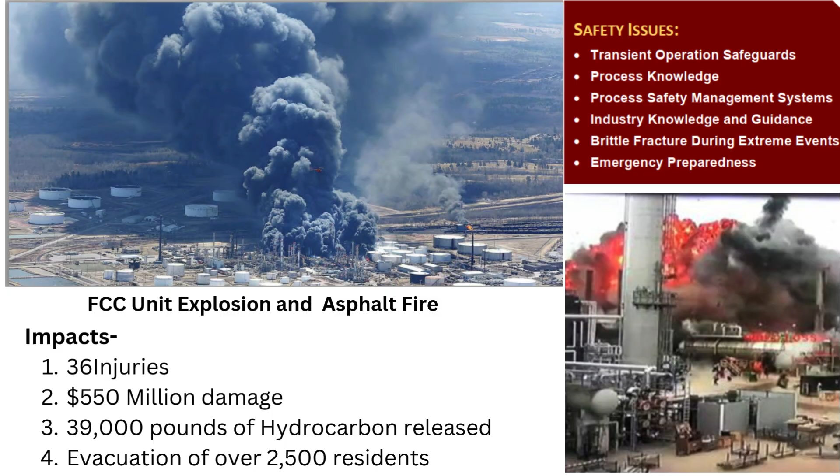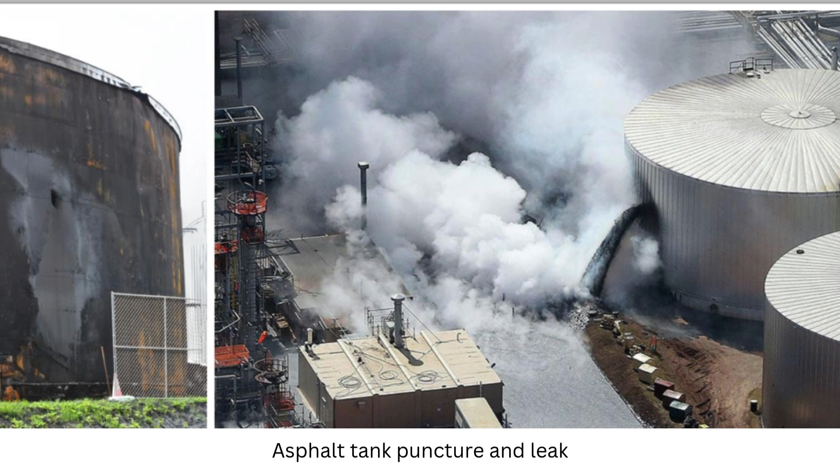On April 26, 2018, an explosion and subsequent fire at a refinery in Wisconsin caused 36 injuries and $550 million in damages. The explosion, during a planned maintenance shutdown, released 39,000 pounds of flammable hydrocarbon vapors and punctured an asphalt tank, leading to fires and evacuation of over 2,500 residents. The nearby hydrofluoric acid storage tank remained intact, avoiding a potential catastrophic release.

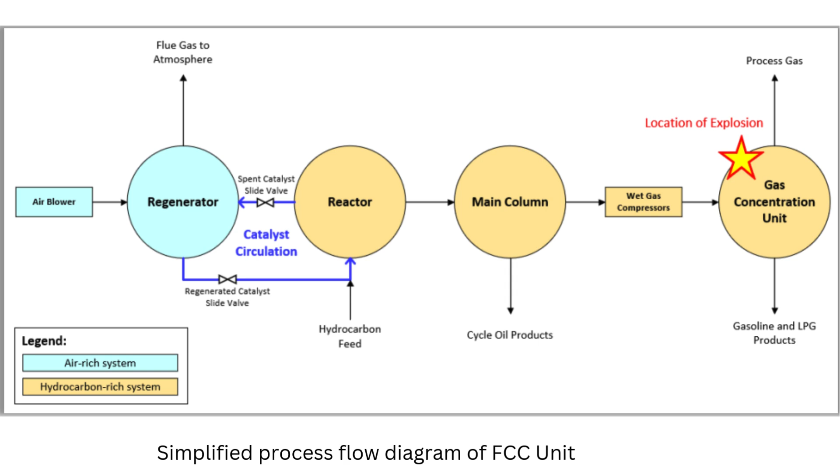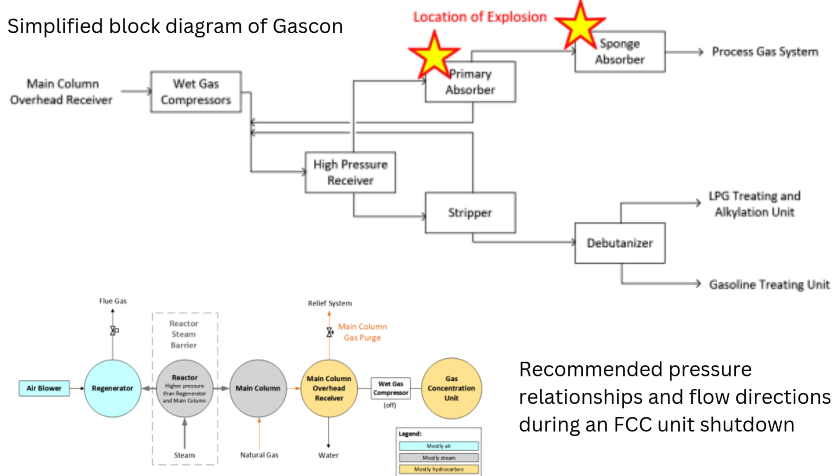What happened? Operators were shutting down the FCC unit, following revised procedures that included draining liquids, purging systems, and preparing for chemical cleaning. The shutdown process involved balancing pressures in critical systems to prevent hazardous air and hydrocarbon mixing.

At 9:58 a.m., during the shutdown, pressure imbalances allowed air to mix with hydrocarbons in the primary absorber and sponge absorber vessels. This resulted in an explosion that sent over 100 pieces of debris across the refinery, shaking buildings over a mile away.

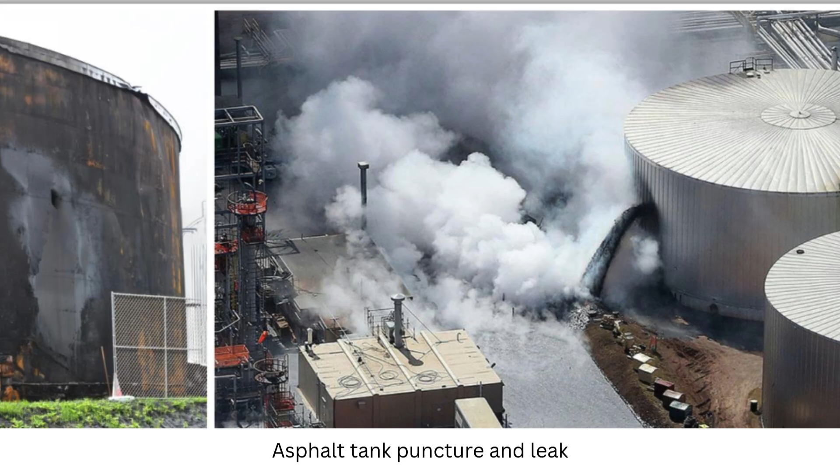The debris punctured an asphalt tank, releasing approximately 17,000 barrels of hot asphalt, which began flowing outside the containment area. At around 12 p.m., the spilled asphalt ignited, leading to multiple fires in the refinery.

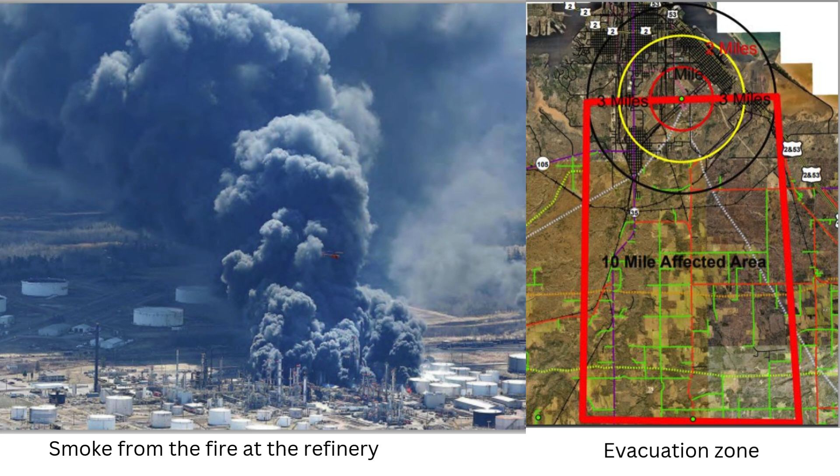Emergency responders worked to contain the fires, while the city of Superior evacuated residents within a 3-mile radius and issued advisories for nearby areas. Smoke and concerns about toxic hydrofluoric acid prompted a shelter-in-place advisory in Duluth, Minnesota, at 8 p.m. The fires were extinguished by midnight, and evacuation orders were lifted the following morning.

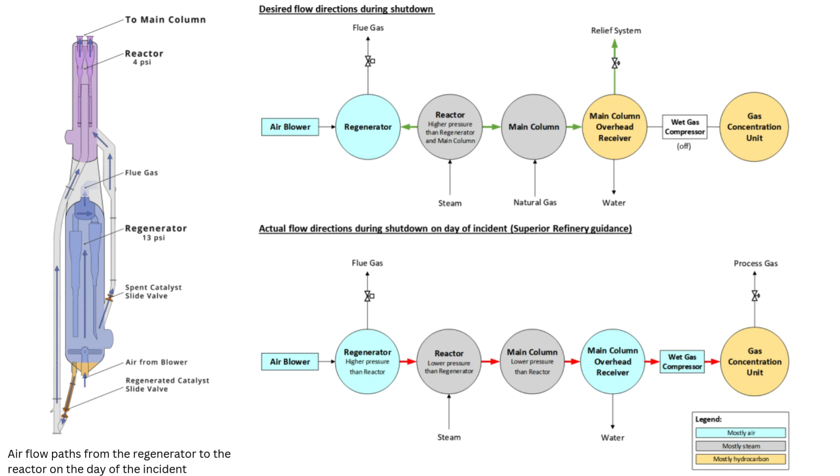What are the root causes? Operational gaps: failure to maintain a reactor steam barrier to separate air and hydrocarbons. Equipment issues: erosion of a catalyst slide valve allowed air to enter hydrocarbon-filled equipment, creating a flammable mixture.

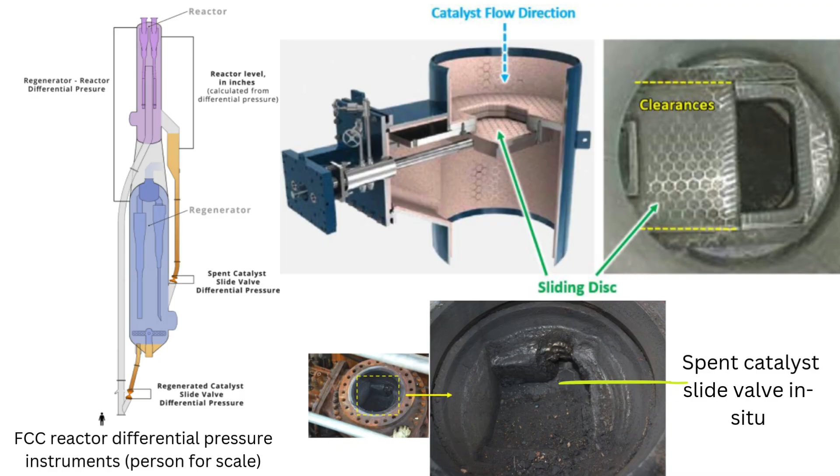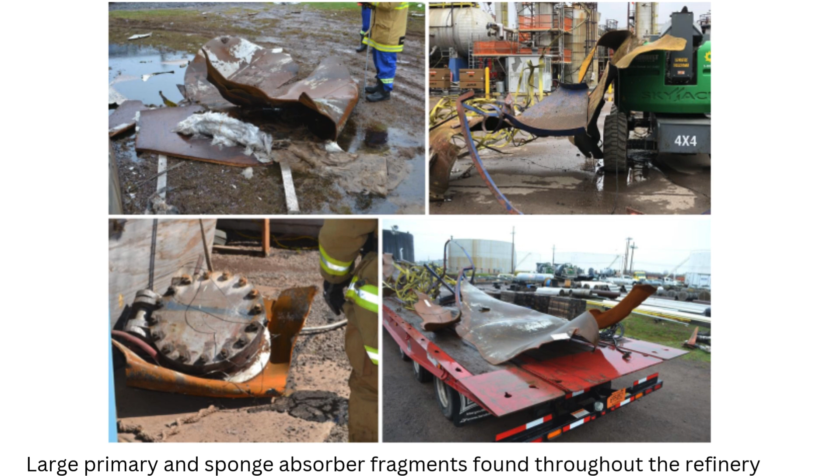Knowledge deficiency: operators lacked training and adequate understanding of FCC shutdown hazards, and procedures deviated from licensor guidelines. Material vulnerability: the vessels involved were made from brittle steel, which shattered under explosive force, exacerbating the damage.

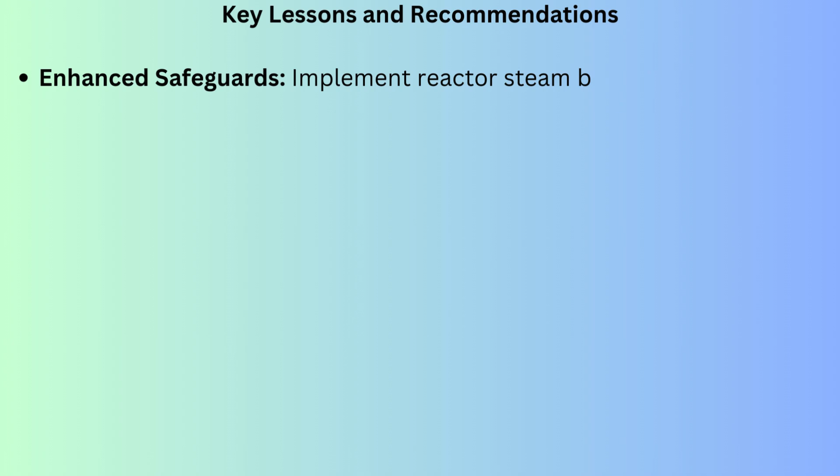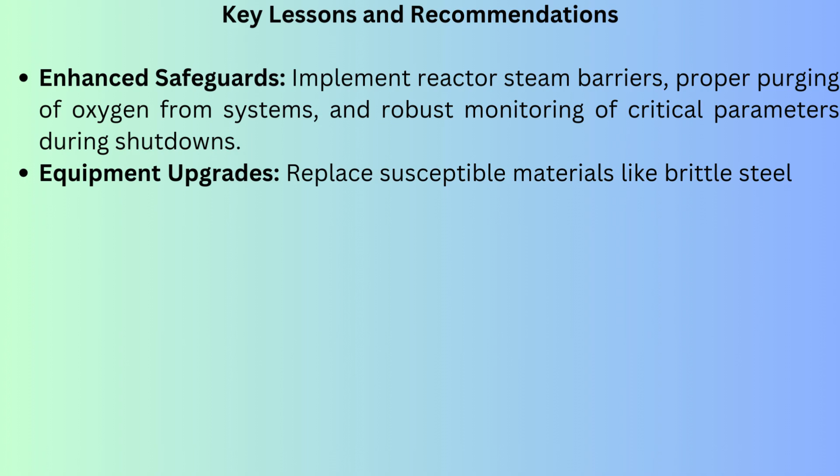Key lessons and recommendations. 1. Enhanced safeguards: implement reactor steam barriers, proper purging of oxygen from systems, and robust monitoring of critical parameters during shutdowns. 2. Equipment upgrades: replace susceptible materials like brittle steel and develop better maintenance programs for slide valves.

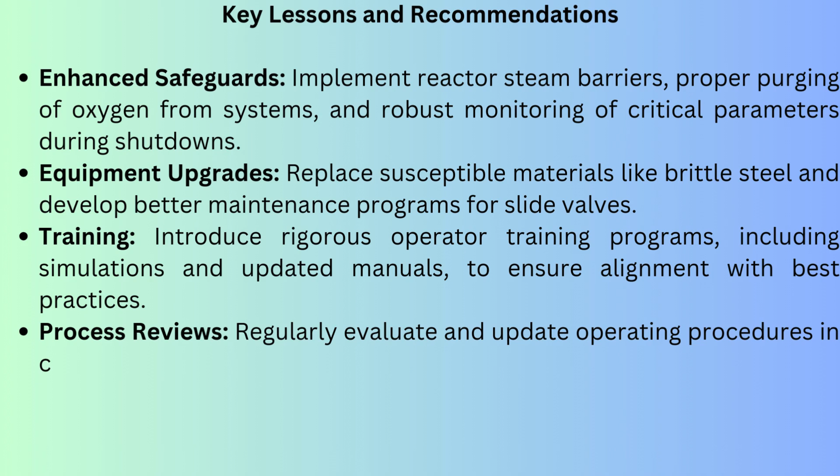3. Training: introduce rigorous operator training programs, including simulations and updated manuals, to ensure alignment with best practices. 4. Process reviews: regularly evaluate and update operating procedures in consultation with licensor and industry standards to address transient operation hazards. 5. Emergency preparedness: improve response strategies for incidents involving materials like asphalt and pyrophoric substances.